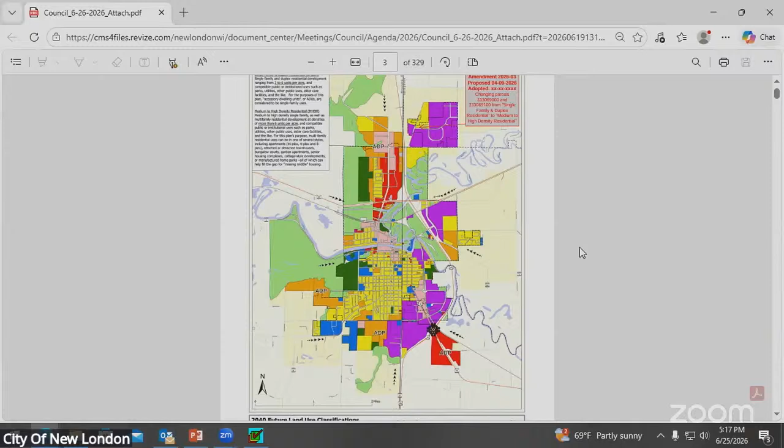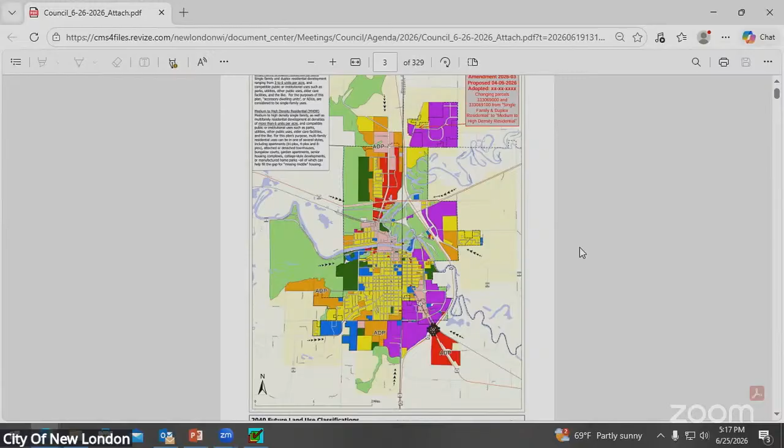But for those of you that tuned into the Plan Commission meeting on May 28th, you may recall, this is for the amendment on the northeast side of town to increase the density allowance for a proposal that we've received for some townhomes up in that area. So based on the density that was being proposed, the current future land use and zoning for the area didn't support that level of density for the housing that was being proposed. So we are required to change our comprehensive plan first to support the zoning district, which would then support the density of housing that is being proposed here.

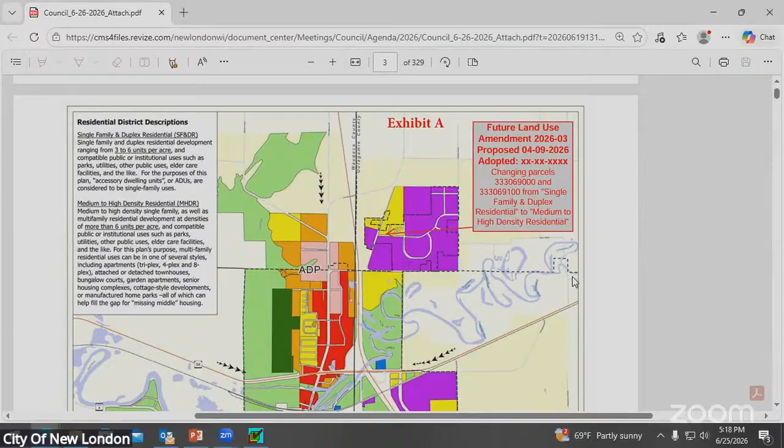So we had our public hearing at the Plan Commission meeting on May 28th. From that meeting, the Plan Commission did vote to approve a resolution to the council to have a public hearing, which is being held tonight. So this is the first reading for this proposal. If it goes forward, we would have a second reading at our next council meeting for this. Happy to answer any questions. Thank you. Any further discussion?

All right, hearing none, we will move on to consider approval of ordinance amending the future land use map in the city 2040 comprehensive plan as indicated in amendment 2026-03. First reading. Actually, public hearing. Oh, yeah. Sorry. All right. We'll open up the floor for public hearing. Any public comment? Public comment. Any public comment? Hearing none, we will close that public hearing.

Now we can move on to consider approval of an ordinance amending the future land use map in the city's 2040 comprehensive plan as indicated in the amendment 2026-03 for the first reading. I'll make that motion, Your Honor. Motion made by Mr. Fiché. To amend the future land use map, and as stated. Second. Seconded by Mr. Dorsey. Any further discussion? Hearing none, please cast your ballots. That motion is carried 10-0. All right.

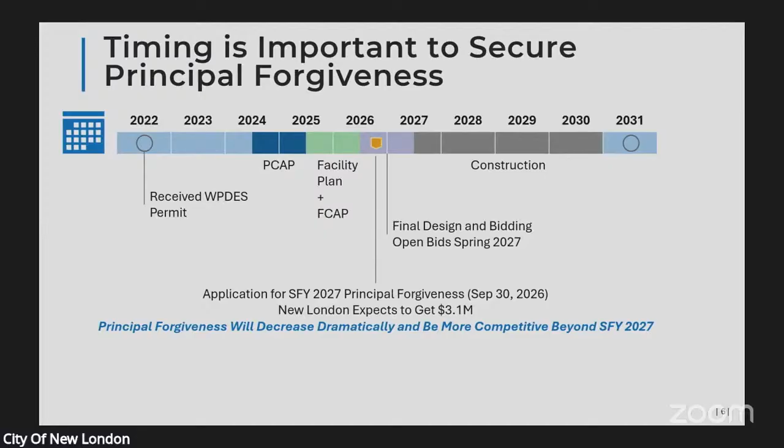Before, you need to be in compliance by July 2031. That timing is important because the principal forgiveness program is going to drastically change after state fiscal year 2027. If you miss that September 30th window, I think we can say with a lot of certainty you won't get $3.1 million. And there's a chance you'd get zero, because the amount of principal forgiveness that's available is going to drastically get ratcheted down. Okay, so that's why we're here tonight, and we want to keep this process moving. There's grant money at stake.

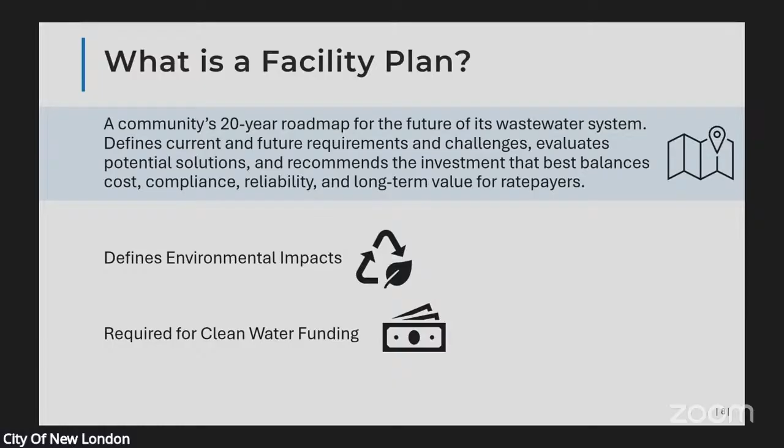What's a facility plan? DNR requires it, EPA requires it. At a time like this, when you're proposing improvements, or you're contemplating improvements and ultimately recommending a path forward, the facility plan documents that evaluation, documents the recommendation, defines any environmental impacts, and it's a requirement of the Clean Water Fund, which you intend to use to fund your improvements. In effect, a facility plan is your 20-year roadmap for the future of the wastewater system. And this public hearing is one of the requirements of that facility plan.

We looked at 7 different alternatives. We've talked about all of those here in the past. One of the alternatives was do nothing. You always have to include the do nothing alternative. You can see that just doesn't address any of the 4 issues that the facility is facing. Okay, you won't maintain compliance. It's not a feasible alternative. The other 3 alternatives, 2, 3, and 4, were aimed exclusively at the phosphorus issue. And so that's why the one box is checked for those different alternatives.

Alternative 2, and we've talked about these at length in the past, and my intention isn't to spend much time on it, but the multi-discharger variance is you pay your way to compliance for just a period of time. So that would give you a way to comply with your phosphorus limit until only 2035, and all the money that you spend on the MDV is gone forever. You're just buying annual compliance. Alternative 3 was either adaptive management or a trade with a bunch of non-point landowners or agricultural operations. All the money that you spend on that would be gone forever. None of those alternatives are realistic long-term strategies for compliance, and not well conceived for where you are in the watershed and the size of your facility.

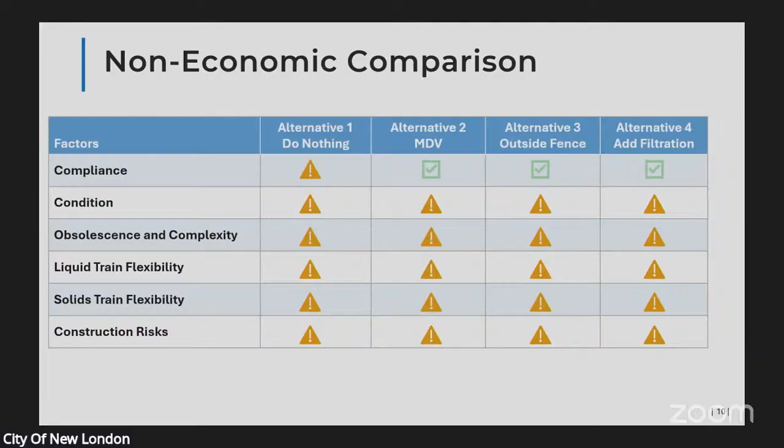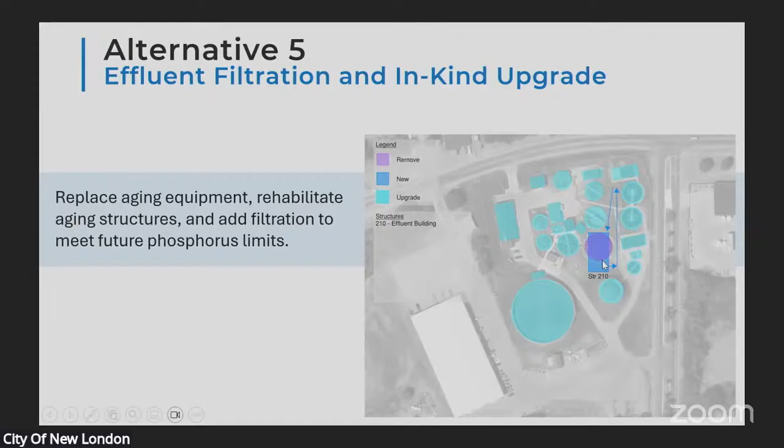So we spent the majority of the time talking about alternatives, investments that would address the lion's share or all of the issues there at the facility. Alternative number 5 would be a comprehensive upgrade to your existing facility. It would replace aging equipment, rehabilitate aging structures, and add filtration. That's the blue box, add filtration to meet future phosphorus limits. What we're showing in this graphic is a schematic of your facility. You can see how complicated it is. I'll repeat again, this is one of the most complicated facilities in the state. We would make it more complicated by adding filtration and effluent pumping before disinfection. So it would achieve phosphorus compliance, but it would increase the complexity of this complex facility.

It would retain all your existing infrastructure. It would retain all your existing unit processes that are inefficient to operate, and hinder your ability to operate cost effectively in this new era of nutrient removal. And you would continue to produce Class B biosolids, dilute Class B biosolids. We've talked at length about the logistical challenges and the cost challenges, and frankly, the potential that that's no longer either a feasible or allowable practice moving forward in the future.

And Mike, the efficiency of this design, pumping 4 times. You want to address that a little bit? Yeah. So I don't know of another facility that pumps, let's see, maybe 1, 2, 3. Manitowoc pumps their wastewater 3 times, but there's a lot of treatment facilities in the state. I only know of Manitowoc that has to pump it 3 times. Conceivably, we'd add a 4th pumping station and we'd pump it again. That's very inefficient.

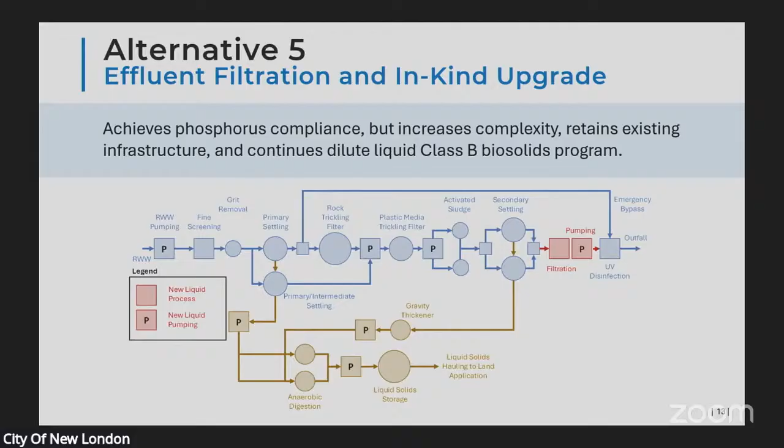And you would be preserving all of that for another generation and probably beyond, because you were about to make a big investment and you wouldn't want to walk away from that investment. So if we kind of summarize things, alternative 5 is a phosphorus compliance strategy. It would address a lot of the aging equipment. It has the most favorable capital costs. That's not the total economic picture. We'll look at that in a little while, but it does have a more favorable capital cost.

But its disadvantages are pretty significant and pervasive throughout the facility. You retain that obsolete complexity designed for a different era that's not coming back. You don't have the ability to meet a future nitrogen limit. You're stuck with Class B, or you're making a large investment in Class B liquid biosolids, and you're forced to construct this facility while maintaining and doing a lot of work at your existing facility while you continue to use it and achieve compliance. There's a great potential for surprises along the way and unexpected costs.

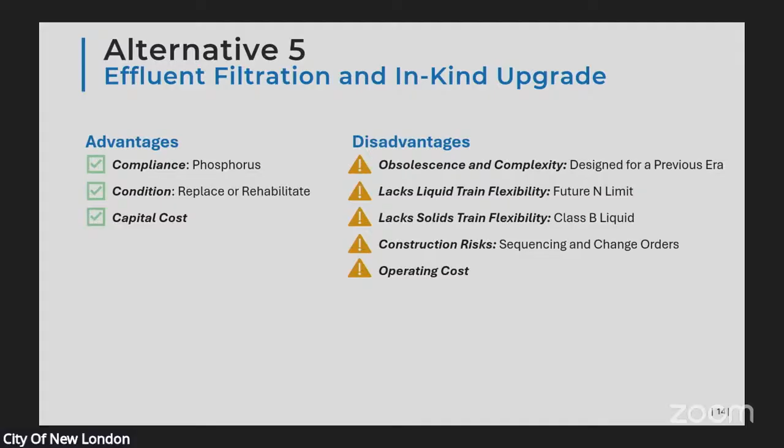Alternative 6 would abandon or effectively abandon the existing facility and build a brand new facility west of the Public Works building in the Sledding Hill area. You construct a new, modern, streamlined facility, well-designed for phosphorus compliance, well-designed for a future nitrogen limit. But with alternative 6, you would continue to produce Class B biosolids and dispose of those as a regulated Class B product.

What are shown in the dark lines on the screen right now would be new structures constructed west of the Public Works building. Really, the only infrastructure that you would continue to use is up here at the top right-hand side of this graphic. That's your existing pumping station. We'd recondition it for another generation of service, but you would retain the use of that existing infrastructure. Everything else associated with the facility would be new.

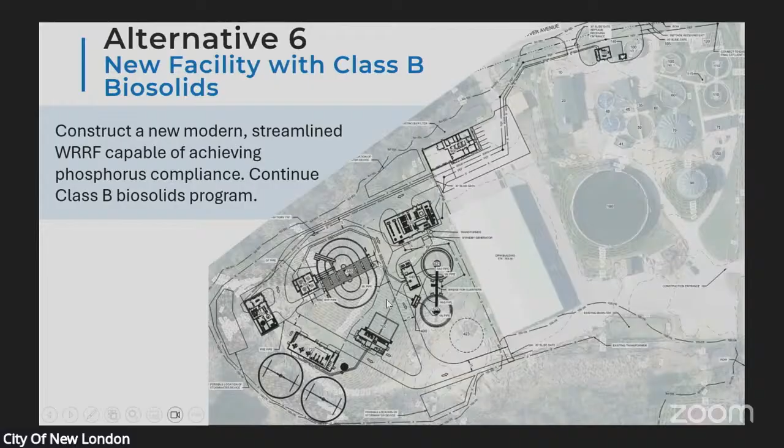This is a schematic of that facility. You'd have raw wastewater pumping, so you'd pump it one time. You'd have screening to remove debris, grit removal to remove sand and gravel that comes down the interceptor. You'd have a BNR selector. So this is where biological phosphorus removal happens, and where in the future nitrogen removal would happen. You'd have an oxidation ditch, a well-proven activated sludge process that's used throughout the country. There's a lot of oxidation ditch facilities here in Wisconsin. It's a well-proven, stable process selection. Secondary clarifiers, you would filter it for phosphorus compliance, and then disinfect it using UV disinfection.

Biosolids is as simple as it gets. You would store the residual solids the liquid train produces. You would thicken those up. You would store them for 180 to 360 days before hauling them out to the fields. One thing to point out is with this process, you would continue to have a highly regulated Class B land application program, and you could only land apply those by injecting those solids or incorporating them, having them disked in within a couple hours of land application. Very simple process, but it does restrict your land application program. It'd be heavily regulated like it is today.

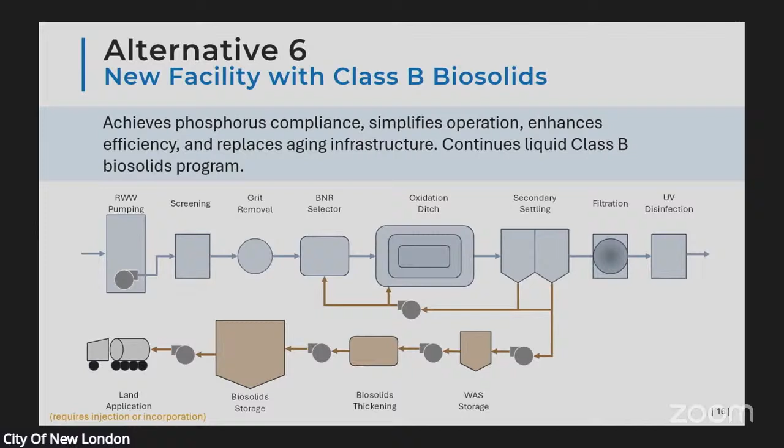But that alternative is a fundamental shift in how you're treating the water. You would be converting from a fixed film process to an activated sludge process. It'd be reasonable for anybody to ask, well, is that done very often? We're showing some examples here where a lot of your peers around the state, when they were faced with making another significant capital improvement intended for multiple generations, have made the same decision to abandon their fixed film process. A lot of facilities made this conversion a long time ago. Trickling filters were popular in the 50s and 60s. What I'm showing here are some in the last 20 years or so around the state that have converted from a fixed film process to activated sludge.

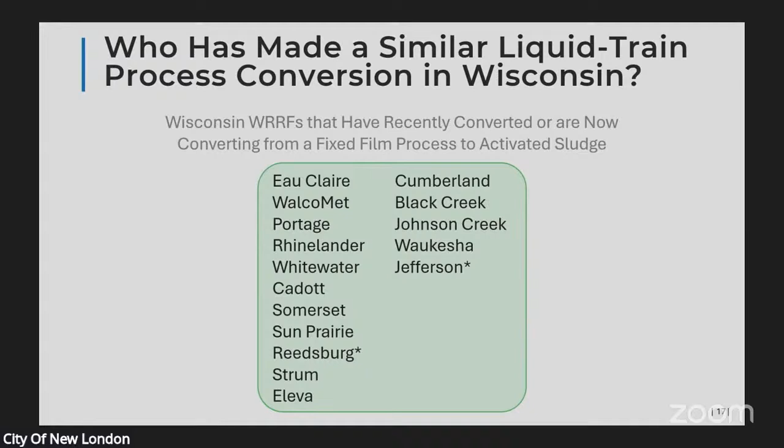Alternative 6 really checks all the boxes except 2. It addresses compliance and condition, obsolescence, complexity with a much simpler plant. It's able to handle a future nitrogen limit. It's a much cleaner construction project. What it doesn't offer is solids train flexibility. We would continue to produce a Class B biosolids product.

Remind everybody, Class B is what you have today. It's heavily regulated, and DNR restricts the fields that it can be applied on. They regulate the application rates it can be applied on. They regulate the soil types it can be applied on. And so all those logistical challenges that are getting increasingly challenging would continue into the future.

It's also more expensive than the previous alternative from a capital cost standpoint. It is more efficient from an annual operating cost standpoint. Again, we'll look at the total cost picture in a minute. Alternative 7, and I think this is what the Board of Public Works recommended moving forward with tonight, was Alternative 7. The liquid train for Alternative 7 is the same as the one that I talked about previously for Alternative 6, and the only difference is on the solids train.

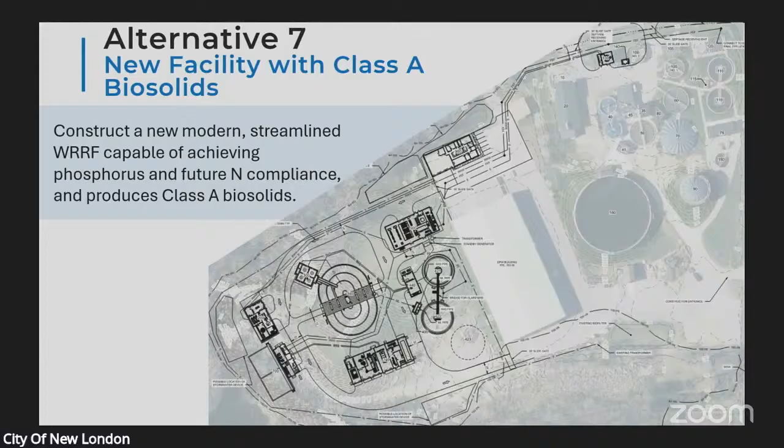So instead of being a cost to your operation, it becomes a revenue producer, okay? The cost of land application, we would expect that to just go to 0. There's a chance it could produce a little bit of revenue. This is showing a schematic of that alternative. The liquid train is the same. Screen it, remove the grit, BNR selector for nutrient removal, oxidation ditch, secondary clarifier, filtration, UV disinfection. A much simpler, much more efficient liquid train system than you have today.

Biosolids, the residuals that the liquid treatment process produces, go into temporary WAS storage. We would dewater it. We'd squeeze the water out of those solids so that instead of being 97% water, it becomes about 80% water. We squeeze as much water as we can out of it, and then we put it into a heat dryer where it goes into an oven, if you will, and the water is evaporated off and you're left with about a 95% or more solid product. The water content goes down to about 5% or less.

We create a pellet, and then that pellet would be stored temporarily until the agricultural landowner comes and takes it back to their facility. The point is, you have a lot less material to deal with, and once you produce a Class A product, it's no longer regulated. Landowners can take it, just like you do Milorganite, and do what they want with it.

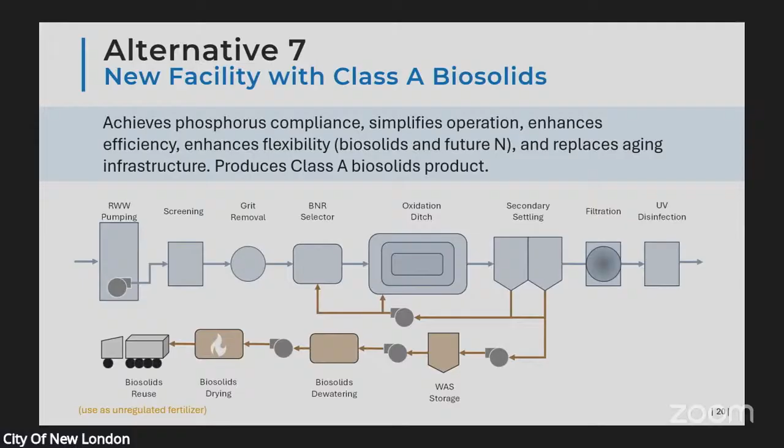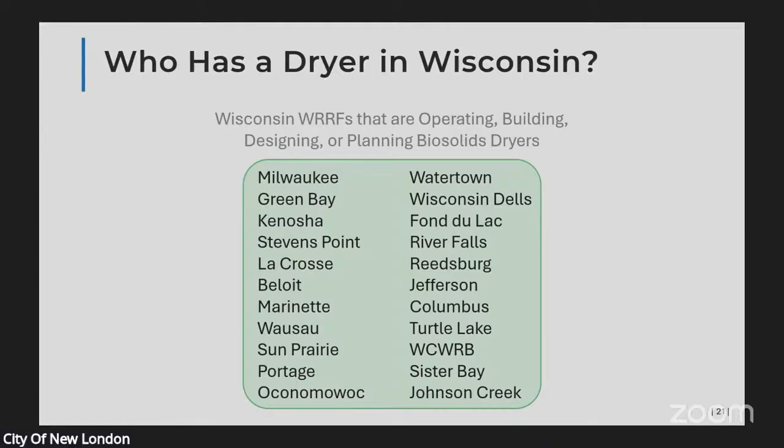One would ask, well, is anybody else doing this drying operation? There's a lot of other facilities that are facing the same challenges that you're facing, have gone through very similar analyses, and have come to the same conclusion that Class A is the right investment for the long term. I've got listed here some facilities that are currently operating, building, designing, or planning a biosolids dryer. And I don't mean passively interested, they are actively pursuing a dryer. So you can see a lot of your peers around the state have gone through the same analysis and decided that drying is their right next investment for their biosolids program.

And this particular alternative, from a non-economic standpoint, checks all the boxes, okay? Achieves phosphorus compliance. You've got a brand new facility that addresses the age of your existing equipment infrastructure. It's simpler, it's more efficient, it's more designed for the modern age, so it addresses that obsolescence and complexity. It gives you the ability to meet a future nitrogen limit without any more capital cost. It's inherently in the design. Gives you the solids train flexibility to produce an unregulated Class A fertilizer pellet.

It's a much cleaner construction project than any significant work on your existing facility, because it's an entirely new facility. You continue to run your old plant while your contractor builds your new one adjacent to it. And when it's ready for commissioning, you just switch over. Much simpler construction. The operating costs are superior. This is, however, from a capital cost standpoint, the most expensive of the three alternatives.